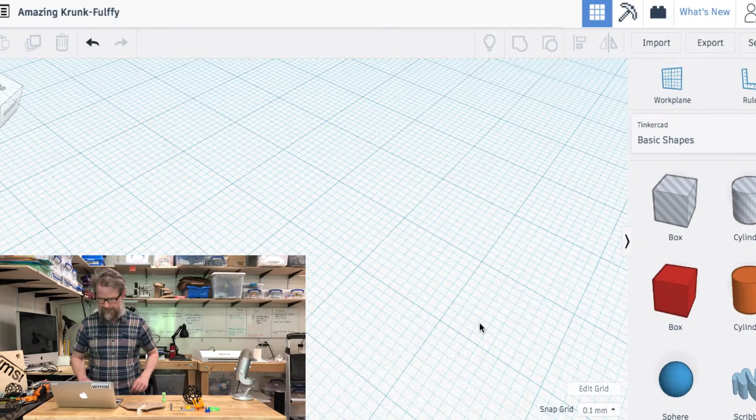So we have a Tinkercad window open. We recommend using Tinkercad for this activity. It's free, it's online, and it has a feature where you can turn anything into a hole, and you'll see that we need that feature. So I'm going to import the Lego hole pattern from a file we found on Thingiverse, and that link is shown in the description below. Let me import that in, it'll take a moment because it's actually quite a large file.

There we go. So I've got the beam imported, and I want to put that hole pattern as if I just stuck this Lego into the computer screen. Now I want that hole pattern into any shape I can dream up.

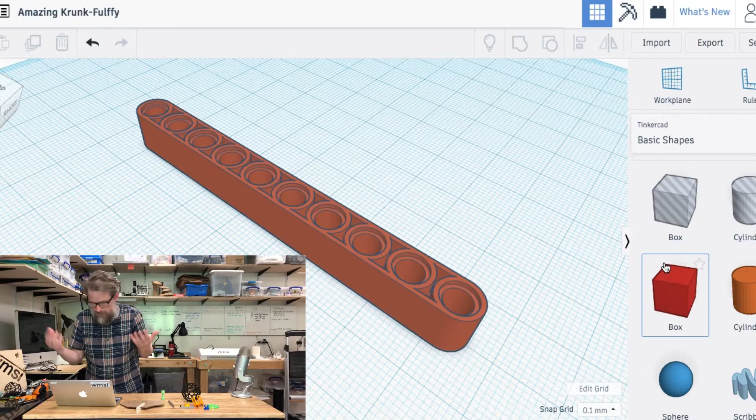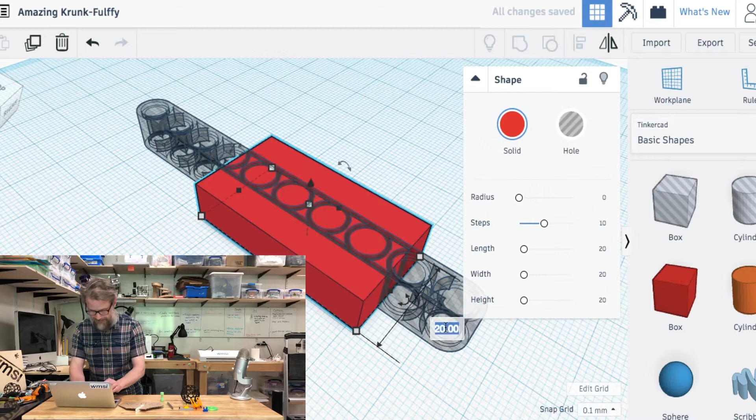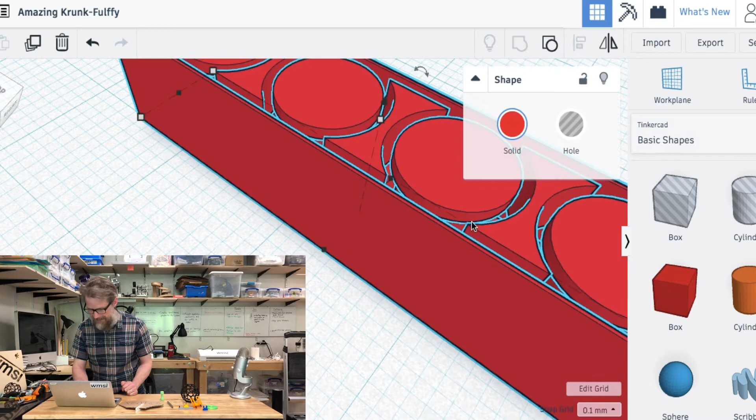So first let's bring a box over this, and let me make that into a hole. I did memorize two key dimensions: the height of the Lego beam is 7.5, and the width is 7.8 millimeters. Let me get that nice and centered here. Center, good, select them all. Now I'm going to join them together, and I'm almost there. So let's zoom in on this. When I first wanted to try this idea, I thought that this is all I was going to have to do. It's going to be awesome. And interestingly, we're not quite there.

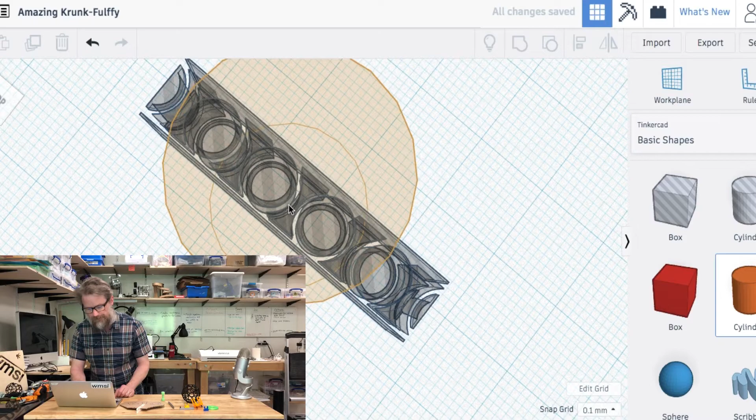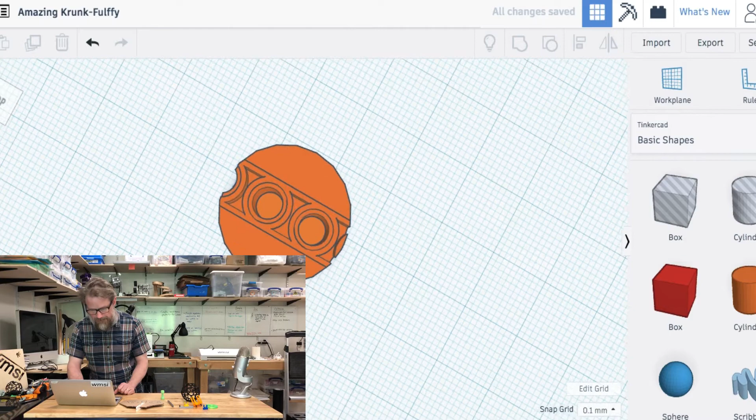So let's do that whole operation just one more time. If I click on that, I make that a hole. Now I've got something that I can use, and this time, let's be a little more creative, Pete. Let's bring out a cylinder. What's wrong with cylinders? Nothing at all. So grab that, and my magic number that I memorized from before was 7.5. Now I'm going to combine both of those together and group them. And here we've got a cool little shape. It almost looks like the Death Star from Star Wars. We actually didn't print that up because we didn't need that in a project.

What we did need in a project that Pete and I came up with, which was pretty fun, was what if we could add our iPhone to a Lego motor and make a slow panning time-lapse setup. Fun idea, and I think we pulled it off. It was pretty quick. So we took the iPhone camera holder that we got from Thingiverse, and we added the holes just like we did to this cylinder Death Star thing. And we now have the Lego pegs, so I can add my iPhone camera right into the Lego beam and put that into this setup here. And with my nice gear, small to big, I get a nice slow turning. Check out this video we made earlier of our slow turn time-lapse panning extravaganza.

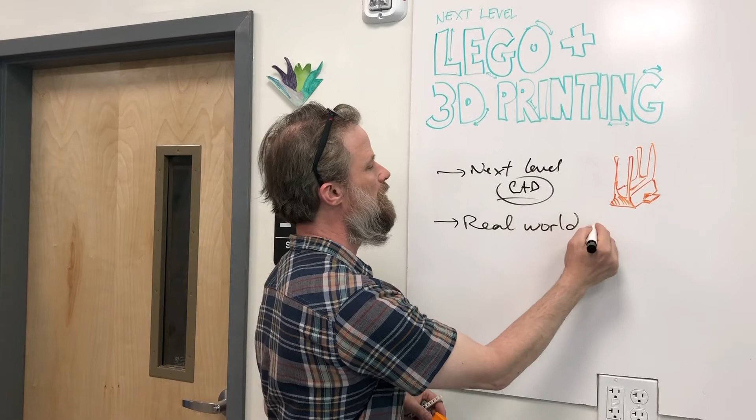In this episode of 5 Minute Classroom, we explored some next level Lego plus 3D printing where we embedded holes, a hole pattern, into the bottom of a shape. That is some next level CAD. With an example like this, you can take your CAD lessons and go in many different directions. This was also an opportunity to explore real world design challenges.

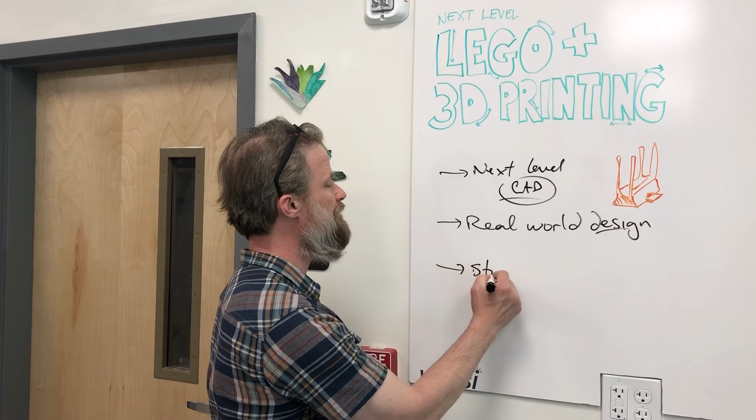We challenged ourselves to make the iPhone holder and create the slow pan time-lapse camera setup. You could do many other projects where the students, driven by their personal interests, can seek out and search many other different types of objects to be 3D printed that they want to adapt to their Lego system to take even further.